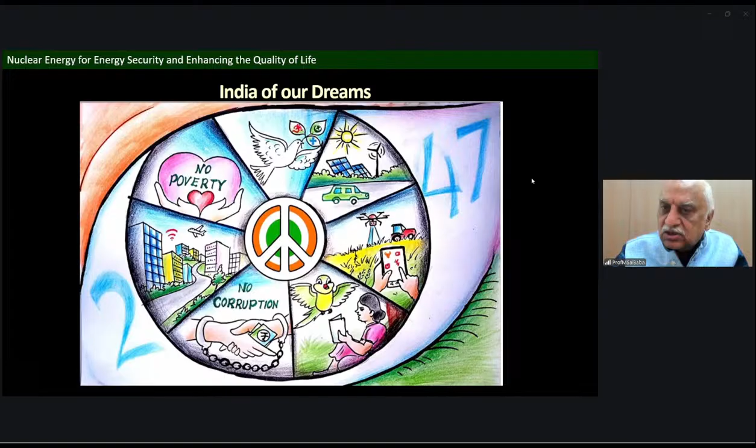Well, I think we all have dreams, and India also has a dream - Viksit Bharat - and this is one of the cartoon competitions, where one child drew what India will be in 2047. You can see it's very impactful - she depicted no poverty, peace, no corruption, education, and communication. A very significant, impactful cartoon which I think has won some award too. I thought I should show this.

But we want an India which is economically developed, scientifically advanced, and militarily strong, with security in terms of energy, water, food, health, and environment. These are all our dreams if we want to have Viksit Bharat. But what is the reality today?

Today, India has 77% of the population with smartphones. This number may be old, it may be a little higher than that. So we're very happy about this progress. But at the same time, more than 330 million Indians still lack access to safe water.

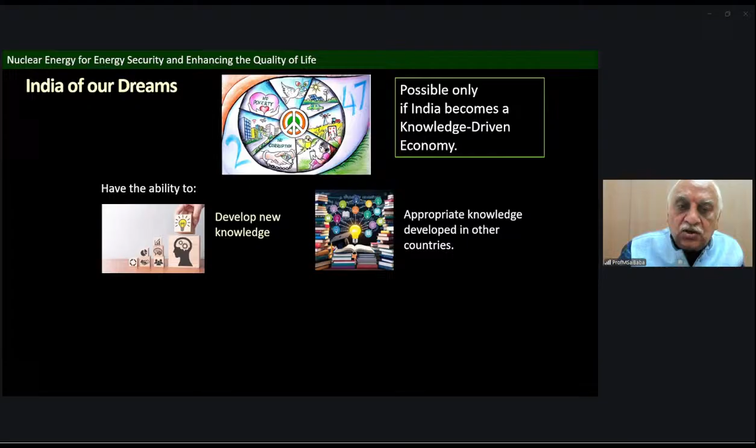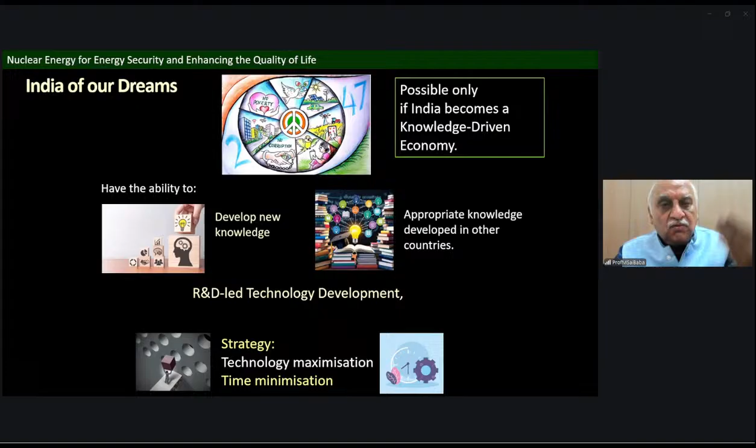This is the kind of contradiction the country is seeing. If you want to realize the India of our dreams, it is possible only when India becomes a knowledge-driven economy, with the ability to develop new knowledge and also appropriate knowledge developed in other countries. It should all be R&D-led technology development, and our strategy should be technology maximization and time minimization.

That is how we will achieve progress and realize the dream of Viksit Bharat within the time frame explained. When you take the society, the pillars of development are energy, environment, and economy. We need energy independence, and we should promote efficient utilization of this energy. While doing so, we need to conserve the environment, or at least minimize the impact of development.

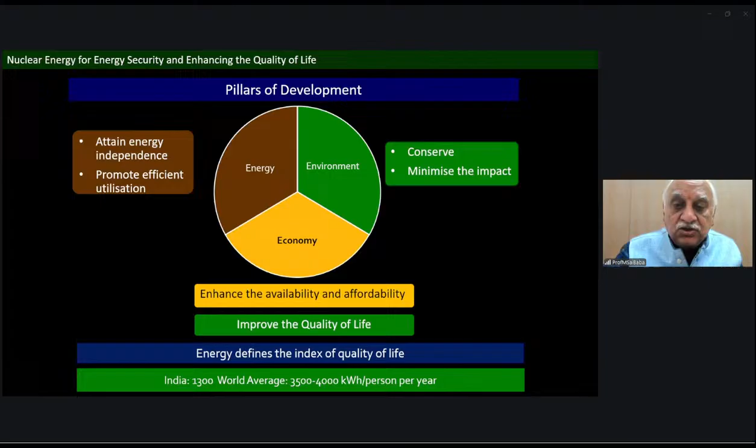And all these things have to be economical and enhance availability and affordability. At the top is energy availability, and all this is because we want to enhance the quality of life. Energy defines the index of quality of life. The world average energy availability is around 3500 to 4000 kilowatt hours per person per year, whereas India has about 1300 today. So that means a long way to go for us to reach the world average.

Forget about the advanced countries. There's something called the Human Development Index, which is a combination of several factors: economy, education, health, and so on. What this plot shows is wherever energy is becoming more available, the Human Development Index is going to be very high. Where are we now today? We are somewhere around 0.6.

Our energy is about 1300 or so. And where you want to be, if you want to reach a level of 0.9, the energy required should be at least 4 to 5 times that. That is the challenge we have in terms of making energy available.

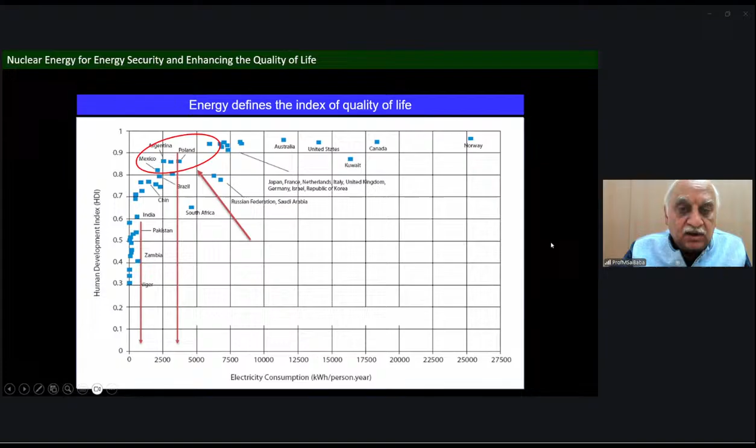Now, what are the challenges? One, we need more energy. When we need more energy, we are also saying we should reduce emissions. It should be cost effective, and more importantly, the public should accept it. These are the challenges of enhancing energy input.

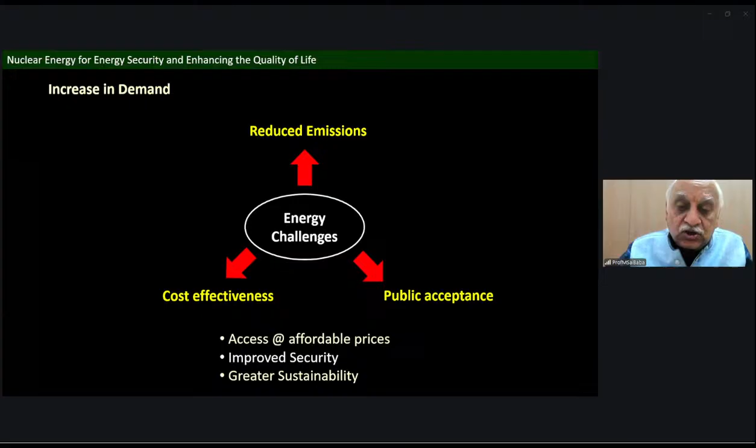The Niti Aayog came out with a government view and said our focus will be access to energy at affordable prices, improved security, and greater sustainability. In the current conflict going on in the Gulf, you would see why we are talking about security — improvements in security are important. There are several sources of energy: solar, wind, hydro, geothermal, hydrogen, fuel cells, battery storage. Multiple options are available for us.

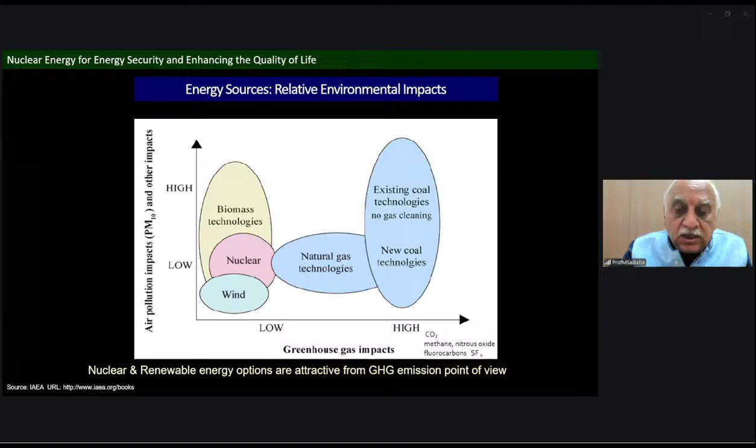When it comes to multiple sources of energy, if you want low greenhouse gases and low air pollution, wind and nuclear are the ones lowest in terms of greenhouse gas emission and air pollution. Now, just quickly looking at other sources: hydro is very good, with large scale displacement, but it's very good for energy production as well as agriculture. However, there are societal issues in terms of large scale displacement, and unfortunately we have almost reached its potential — no more potential to explore when it comes to hydro.

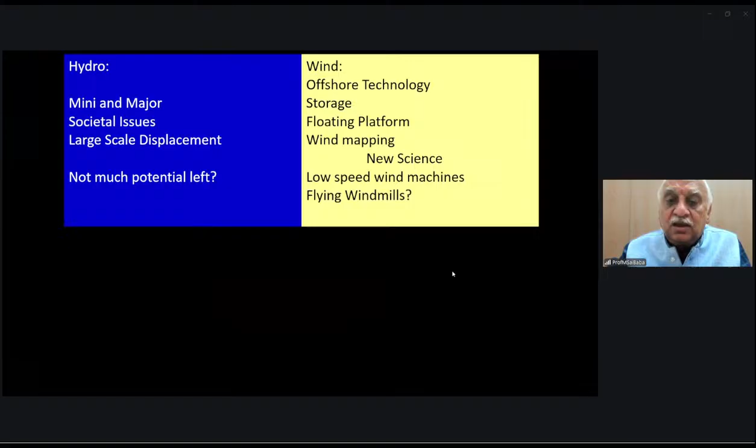When it comes to wind, offshore technology, storage, floating platforms, wind mapping — several things are happening, including low speed wind machines. And when it comes to solar, everywhere solar is there. Everybody thinks solar is good. Yes, it is good, whether photovoltaic or thermal. But the problem is we have to address transmission and distribution problems, economics, and storage.

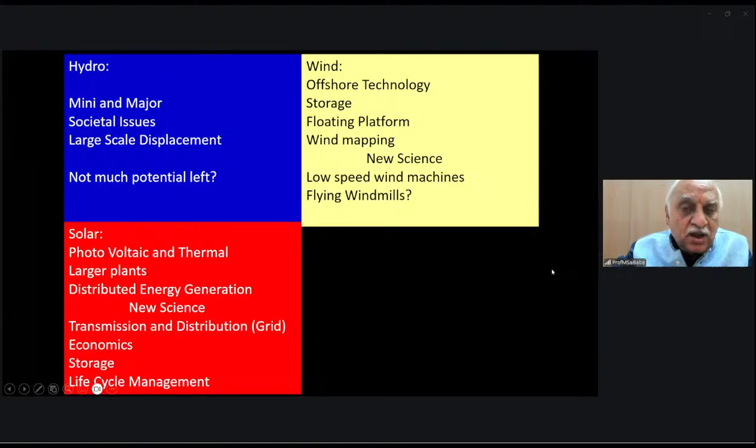Nobody is talking about life cycle management of solar panels. It becomes a huge problem after some time when the solar panels need to be disposed of. Biofuels are a good alternative, but there's a conflict between food and energy for a developing or aspiring country like India, where for a lot of people food security becomes very important. Hence every energy source has its own challenges.

So there are some direct and indirect costs of renewable energy integration. We should create green energy corridors, interstate, to carry surplus from renewable energy. Suppose in Karnataka more green energy is created, then you should be able to transmit it to a state where energy production is less.

Another biggest challenge is the cost of standby capacity. When you want to use renewable energies and they are not available, what will you do? And if they are available, what will you do with the capacity you have added? This is where standby capacity becomes a problem, needed to meet demand when solar and wind power reduces.

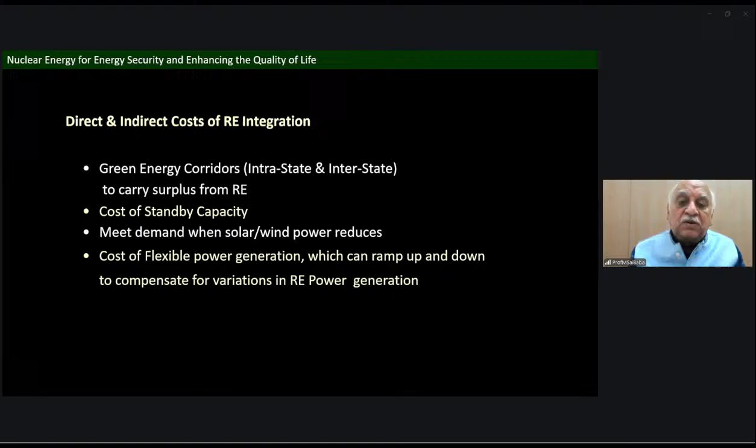Cost of flexible power generation: suppose I have a coal power plant, and you say don't operate it now, operate tomorrow. That means you're cycling the entire machinery. So this flexible power generation can be a big challenge for the technology.

Let's look at what the world is doing. If you take Germany as an example, it's one country which has gone real into renewables. They decided against nuclear, and you can see almost 56% of their energy is coming from renewables. Nuclear has almost become zero due to that decision making.

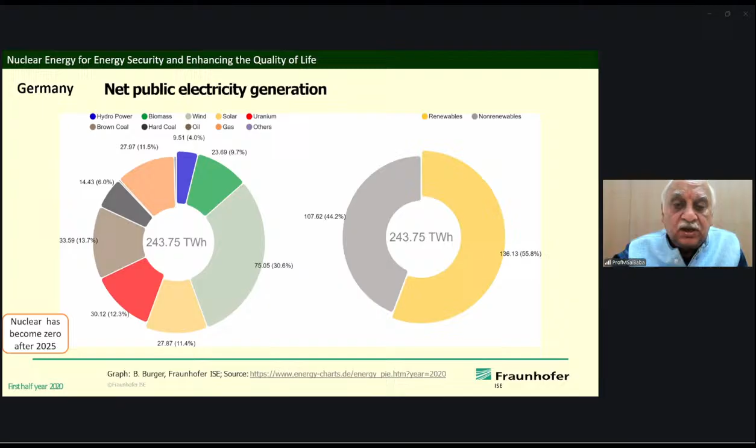When it comes to France, you can still see what used to be 71.7% of consumption energy produced from nuclear has now reduced to about 65%.

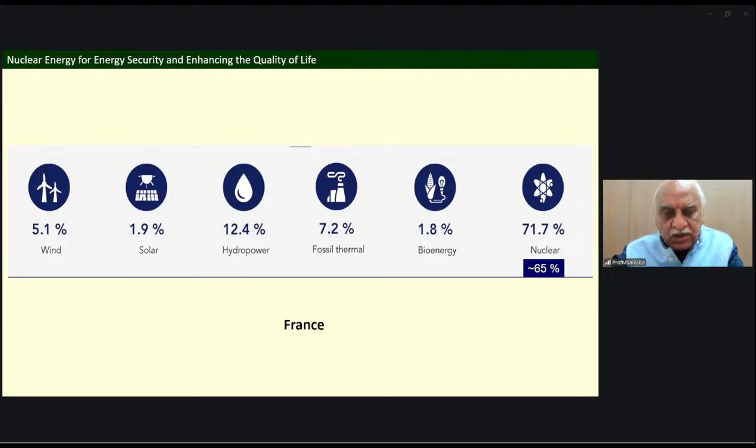So what I want to say is, when it comes to energy generation, still the majority of energy is coming from fossil fuels, and about 79% of it comes from fuel.

This is where I think, when we look into energy - when you use a diesel car, you feel dirty about it, but then you move to electric and feel very clean. It's very good to move to EVs. But then, where is the energy coming from for this electric vehicle? Where is the electricity coming from? If you do not address the source, that means we are only shifting the burden from the car to the power plant. 85% of emissions are energy related, and out of those energy emissions, 95% are carbon dioxide. This is the situation we're facing as far as energy utilization is concerned.

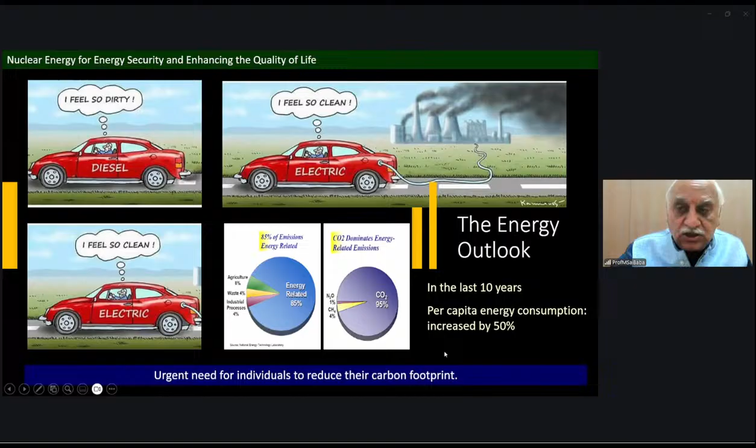In the last 10 years, per capita energy consumption increased by 50%. Just imagine the type of requirement we are having. That means we need to work towards reducing the carbon footprint for each individual. This is a goal set for each individual.

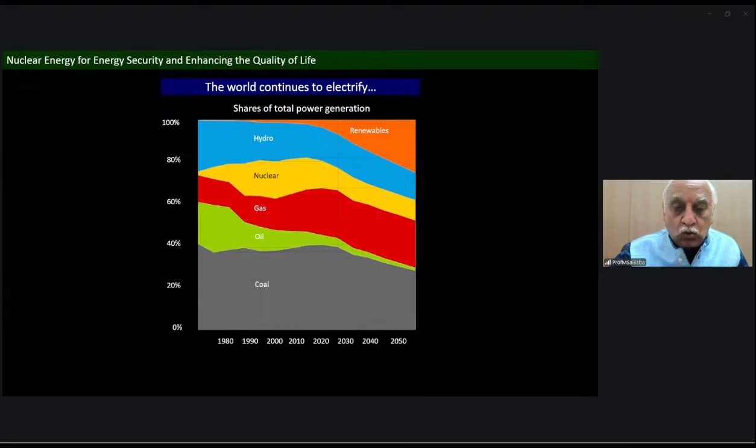Now, whether we like it or not, the world continues to electrify. An analysis says even beyond 2050 or 2060, coal will continue to play a role, maybe about 30% or so. Maybe gas will dominate, oil will come down, nuclear remains stable. Hydro, as I told you, has almost reached its potential. Maybe renewables will start increasing. This is the prediction for the energy outlook for the next 30 to 40 years.

So we need a source of energy which can replace coal, which is almost 30% of it right now. If nuclear is deployable at large scale to meet the base load, I want to repeat and say: if you want to replace coal, the base load requirement can be met by nuclear. Perhaps at present, it could be the only such alternative for the world. Other than going to nuclear, there doesn't seem to be an alternative for replacing coal.

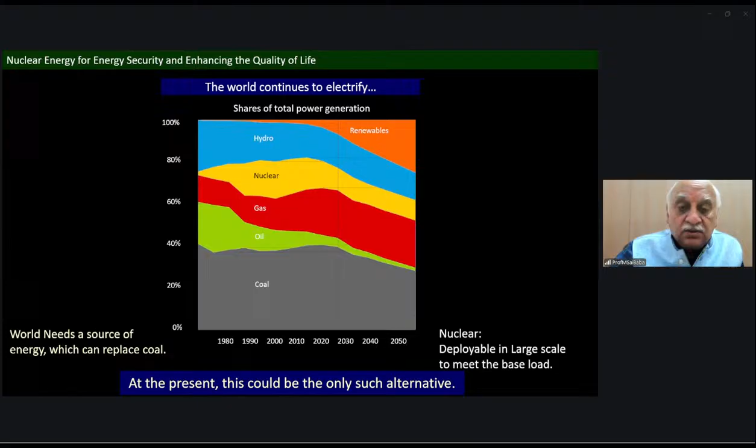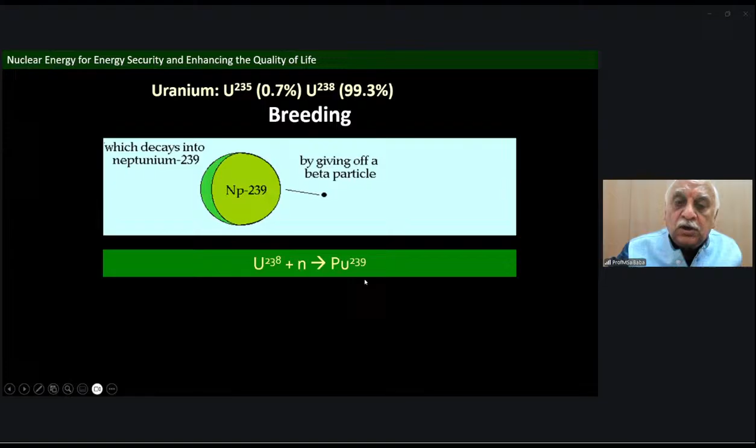Unfortunately, if you take uranium, the only fissile material naturally available is uranium-235, which is only 0.7%. Uranium-238, which we call the elder brother, is 99.3%. Uranium-238 is what we call the fertile material - one which, upon interacting with a neutron, undergoes a chain nuclear reaction, gets converted into neptunium, and then gives you plutonium. That means uranium-238, upon interacting with neutrons, becomes a compound nucleus, undergoes changes, and finally gives you plutonium-239, which is a fissile material. So that means you have uranium-235, which is fissile, and plutonium-239, also fissile, which can be generated in a reactor.

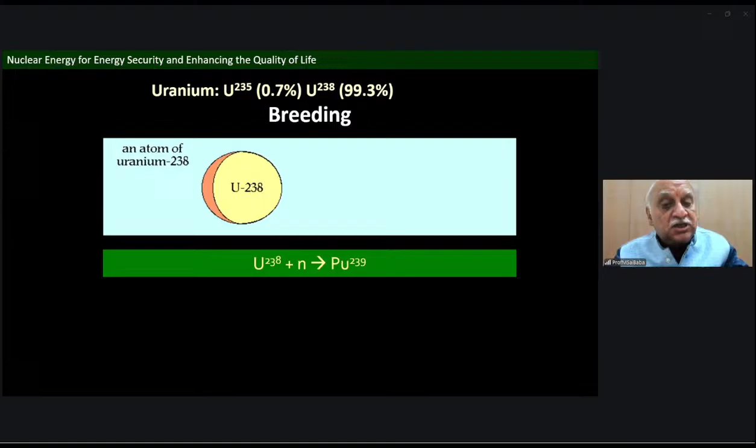When it comes to thorium, thorium is monoisotopic, and it is a fertile material. That means it cannot undergo fission by itself. So when you put it in a reactor, just like uranium-238 to plutonium-239 conversion, thorium-232 will get converted into uranium-233, and uranium-233 is a fissile material. So we have three known fissile materials: uranium-235, plutonium-239, and uranium-233.

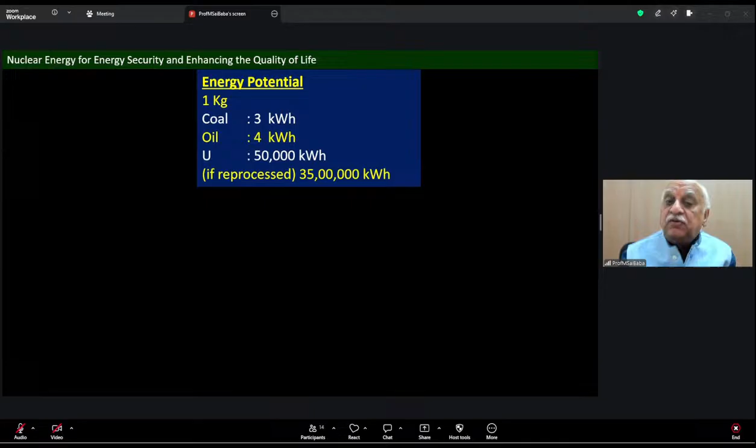Now, let's look at the potential. If I use 1 kilogram of coal, I generate about 3 kilowatt hour of energy. But if I use 1 kilogram of uranium, you can generate as high as 50,000 kilowatt hour. That is a very high potential source of energy.

In terms of a nuclear plant, let's say I have a 1000 megawatt power plant. If you want to run this 1000 megawatt plant for 1 year, you need about 26 lakh tons of coal. But when it comes to nuclear, in a PHWR, you need only about 200 tons of uranium. And if it is used in a breeder reactor, we will need much less uranium, equal to 1.3 tons.

And just for example, if you want 1000 megawatt reactor equivalent energy to be produced, you may need about 20 to 50 square kilometers of solar power. That means for one city like Mumbai, to produce that solar energy you need another adjacent city just to produce the energy. Same thing is true with wind also.

Typically, when you talk about nuclear, people always worry about waste. Every coal plant, because about 10% of the coal is ash, retains it as ash, and you can imagine in 1 year about 2,60,000 tons of ash is generated. When it comes to nuclear, it's about 250 kilograms of plutonium, which we don't want to call waste, maybe 30 tons of high-level waste, and about 800 tons of low-level waste. Just because of the high potential of nuclear, the fuel requirement is less, and hence the waste that is generated is also less.

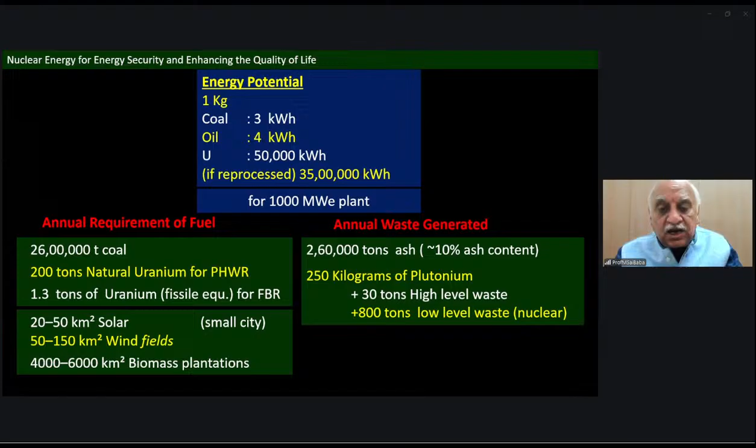What is the situation worldwide? Today we have about 438 reactors operating, generating about 400 gigawatts, about 9% of the total energy produced is through nuclear.

But the problem with nuclear currently is that there are several reactors which are old now. About 67% of the reactors are more than 30 years old, and others are higher in age. That means they are all reaching their aging, many of the reactors are getting aged. So we need to address this issue if we want to sustain the energy contribution from nuclear. In 2025, 4 reactors have been added, 4.4 gigawatt of new energy has been added to nuclear.

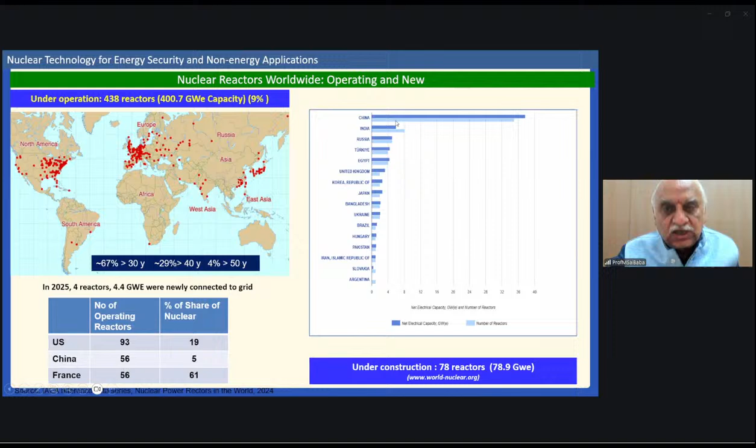Just for information, United States, which has 93 reactors operating, 19% of the energy comes from nuclear. And when it comes to France, today 56 reactors are running, around 61% of the energy is generated from nuclear. There are 78 reactors under construction, almost contributing to 78.9 gigawatt electric. And you can see China is there everywhere. I think whatever you say, China will always be there. China has one of the maximum numbers of reactors coming forward, followed by India and Russia.

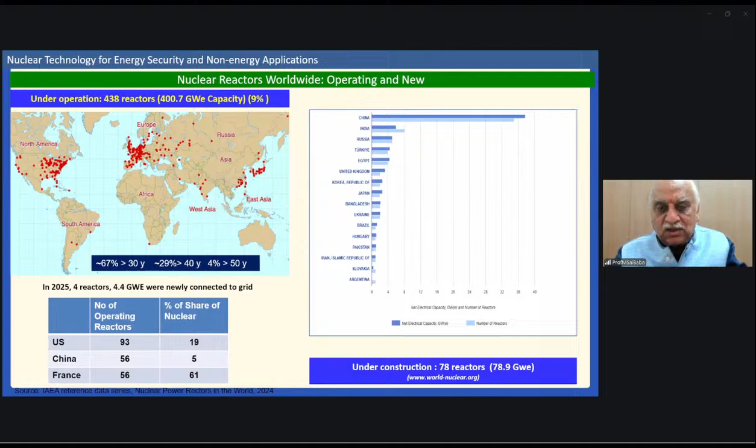So that means nuclear is there and nuclear will be there, and they want to multiply by adding some new reactors. So let me spend a few minutes explaining the 3-stage program of India. Homi Jehangir Bhabha, the father of Indian nuclear energy, envisaged this much before, taking into consideration the Indian situation - we have less uranium and more thorium, and hence he envisaged this 3-stage program.

In the first stage, in a thermal reactor, you put uranium-235 and generate power, along with depleted uranium - since about 99.3% is uranium-238, that will be in the depleted uranium. The plutonium generated in thermal reactors is utilized in a fast reactor, which is a plutonium-fueled fast reactor. It's a breeder reactor, meaning more fuel is generated than consumed, and hence you can sustain the reactor for its lifetime while also generating power.

You introduce thorium into these fast reactors, then you will generate uranium-233, and this uranium-233 along with thorium together will run in uranium-233 breeders - that is the 3rd stage of the program. Many people may think, since we have more thorium, why can't we utilize it early? What I want to say by the 3-stage program is that the uranium-to-plutonium conversion can happen in thermal reactors as well as in fast reactors.

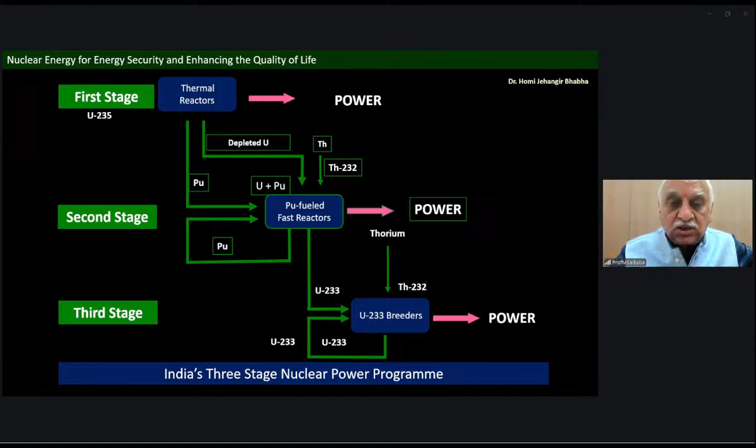The best part of it is that nuclear power is a combination of several things, starting from mining to designing, constructing, operating the reactors. India is self-sufficient in the fuel cycle, starting from fuel fabrication to structural materials to fabricating fuel bundles. India has indigenous technology and self-sufficiency in the fuel cycle. Self-sufficiency is also there in fuel reprocessing and waste management, meaning we are closing the fuel cycle. Closing means you put uranium in a reactor, produce power, take it out, separate the remaining uranium, separate the plutonium that is generated, and make use of it for refabricating.

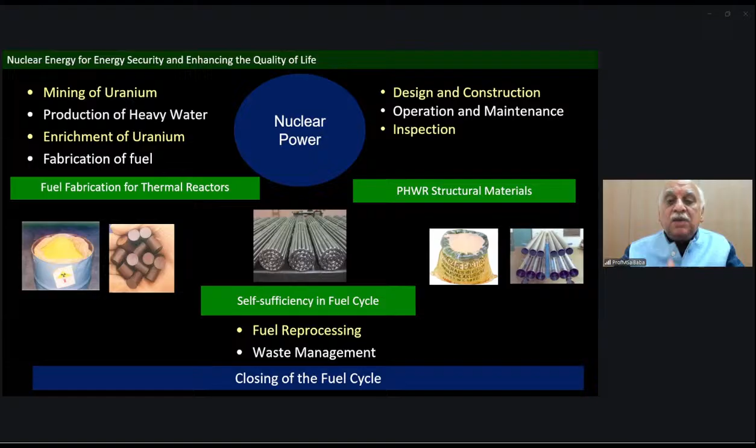Now, how are we doing it here? How have our reactors been performing? The continuous operation of nuclear power plants - you can see the number of reactors operating for more than 300 days is increasing, and multiple reactors are operating for more than 1 year. As the years are passing, the number of reactors operating for more than 1 year is increasing, indicating that it is a mature technology.

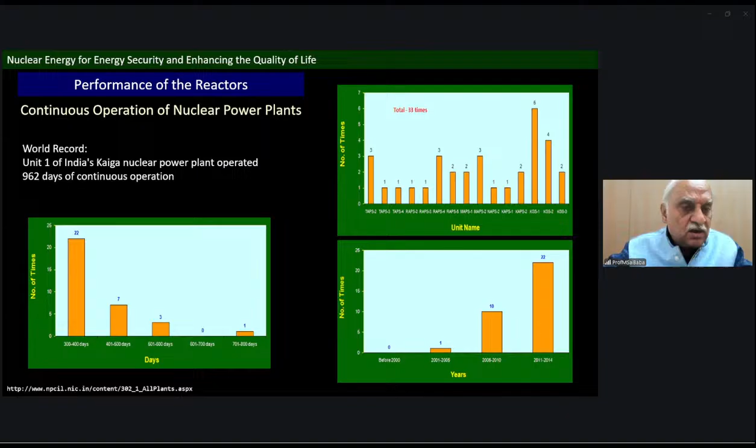India has also set a world record. Its longest operated PHWR was Kaiga Power Reactor, 962 days. I think subsequently other reactors went beyond that, but we could achieve this for the first time at that height. Now our reactors are operating well.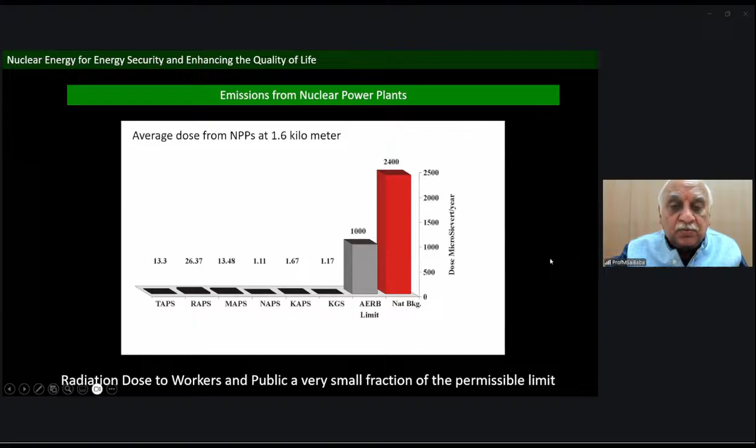And somehow people should also be aware that natural radiation is there. This IERMON data which I'm showing you here shows that there are so many places where the radiation backgrounds are higher, and they are not necessarily connected to any nuclear power plant or nuclear facility being there.

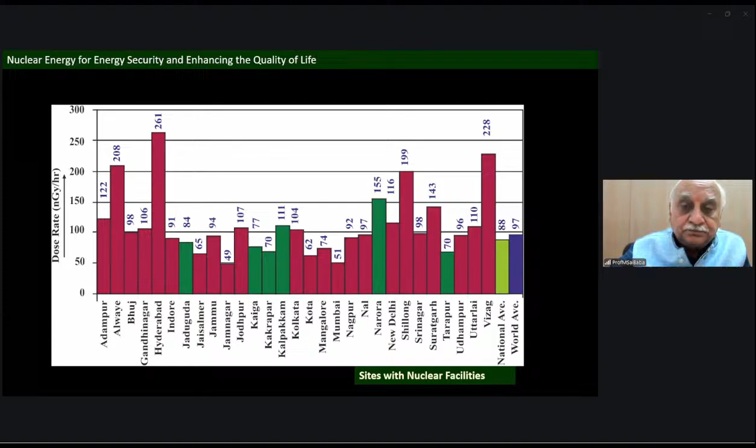Now you can see how the evolution of technology happened. We started with research reactors and went on with thermal reactors. Based on the research done in thermal reactors, we moved to commercial reactors, starting from 220, we went to 540 and 700. We have now standardized on 700. We are also importing reactors and trying to operate them. So these timelines show expansion and economy of scale over a period of time.

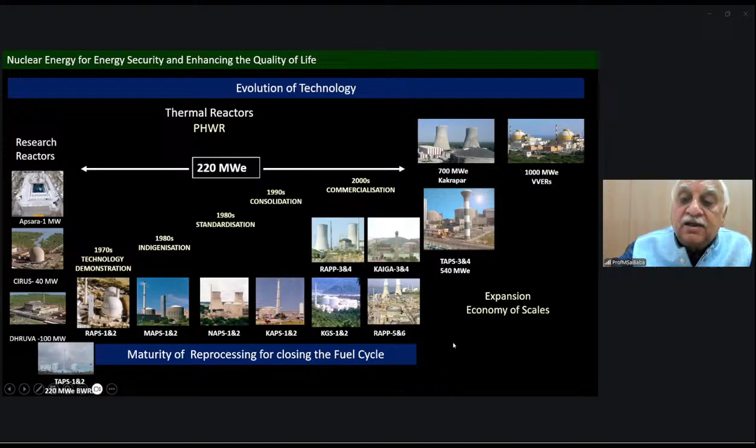While this mastery is happening, we also matured fast reprocessing for the closed fuel cycle, getting ready for the second stage. And when we are thinking about expanding or increasing reactor size, there's also a lot of interest in making the reactor smaller.

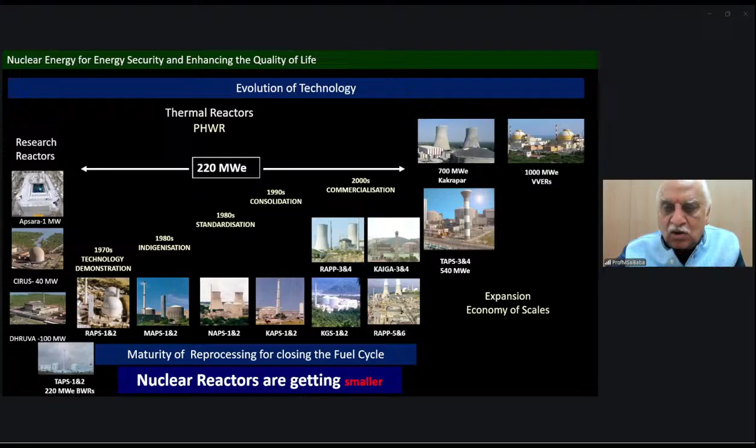Now, no discussion on nuclear would happen without discussing small SMRs. There are issues - maybe it requires a separate topic altogether about how we approach SMRs. But that's how we want to take reactors into smaller ones.

You must have read in the papers a month back or so that India achieved a breakthrough. The fast breeder test reactor at Kalpakkam is a 40 megawatt thermal reactor. It's a sodium-cooled loop type reactor, which is a test reactor but also produces power. It uses a very unique fuel, uranium-plutonium mixed carbide, and has been running for more than 40 years.

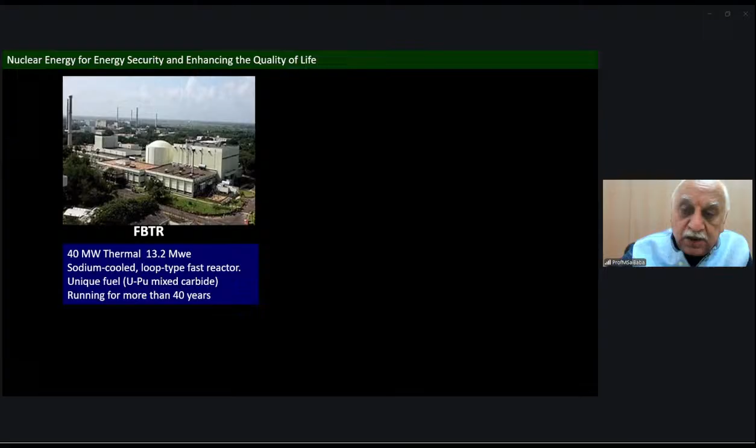Based on all this expertise, the prototype fast breeder reactor is being constructed. I'm very happy that about a month back it went critical, meaning its sustained chain reaction has been demonstrated. It uses a mixed oxide fuel, and it's a pool type reactor.

Essentially, these are serving as a platform for working on fast breeder reactors, providing operational experience and testing new fuel types. If you recall my 3-stage program which I showed a while ago, this is the beginning of the second stage of the reactor. Just to add, we also have a reactor at Kalpakkam called the Kalpakkam Mini Reactor, functioning from 1996 onwards - a very small reactor, but it uses uranium-233 as fuel. Probably for a long time, it's the only reactor in the world which uses uranium-233.

Recently, another research reactor has been added, I think in China. So there's a uniqueness in all 3 stages being demonstrated. This is like gaining experience of using uranium-233 as a fuel. It's also used for neutron radiography. I will mention it a little later.

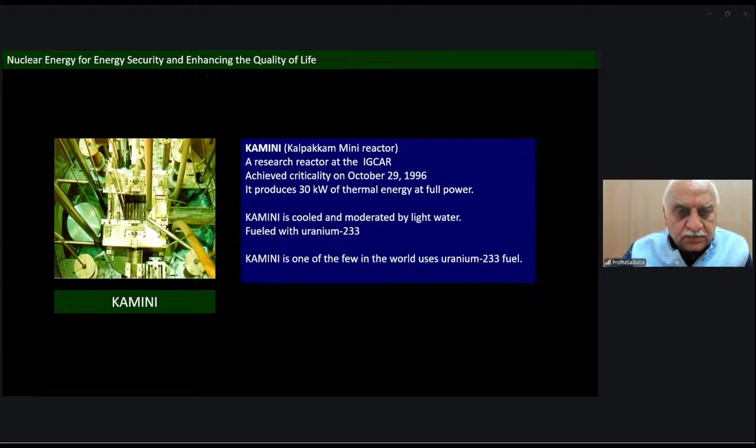A lot of advancements are being talked about. There's always impatience about thorium, so early utilization of thorium. That's why advanced heavy water reactor is being planned, is designed, and is now going through regulatory clearances. Maybe it will happen soon.

The department is also working on high temperature reactors, both for hydrogen production with electricity and desalination, accelerator driven systems, and advanced thought about fusion based systems. These are all things being done for the futuristic development of advanced nuclear energy systems.

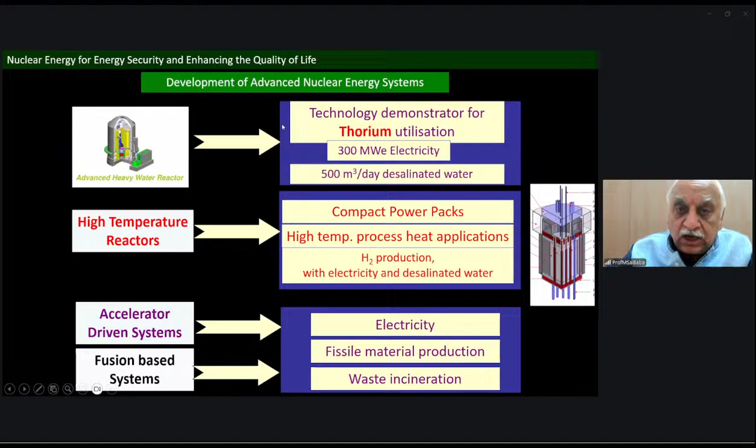Now, what is India's immediate target? You can always say you're telling multiple things, but what is our target? India's government has set a target that we will increase the share of nuclear energy to 10% of total electricity. The world average is about 9%, and we would like to reach that level.

We have to standardize nuclear power plants because we have PHWRs, we have LWRs, we have FBRs, and India has also set a goal of 100 gigawatt by 2050. So what is being talked about is serial production of nuclear equipment and capacity build-up in the industry. That's how multiple reactor construction can happen.

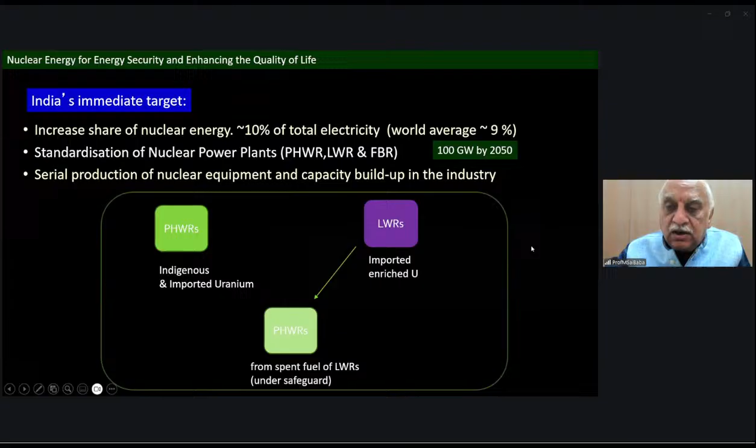So you will have PHWRs with indigenous uranium and also imported uranium put on these reactors under IAEA regulation, and we also have LWRs which are imported. Under these safeguards, the LWRs use enriched uranium. So the fuel coming out of LWRs can be utilized as fuel for PHWRs, because PHWRs use natural uranium fuel. This is how it is envisaged: when you import an LWR with the right to use the fuel, you will be able to utilize it in a PHWR, so that enhances nuclear power.

A lot of discussion is happening on private sector participation. The private sector participation so far has mostly been the EPC part of it. Government is signaling to expand the nuclear energy sector with private sector participation. It has already invited major enterprises like Reliance, Tata, Adani's, and Vedanta to see whether they have interest.

And NTPC is taking big steps. You must have read in newspapers that NTPC already put up a proposal that they would like to develop 2 or 3 sites with nuclear power plants. Jindal, Hindalco, all these people are coming forward to replace their captive coal plants with nuclear power plants. That's where the interest in small modular reactors is also coming.

The operational framework for private sector participation is a question being discussed between the industry and the government. We need to establish public-private partnerships like NPCIL and NTPC. Maybe Niti Aayog said we need to advocate the promotion of SMRs to encourage private sector participation. These are all things that are happening.

The SHANTI Bill has been enacted. Now the SHANTI Bill enables and empowers private entities to enter independently for nuclear energy generation, so either you collaborate with the government agency or you can do it by yourself. But then there's a big challenge which people have not discussed much, and that is skilling.

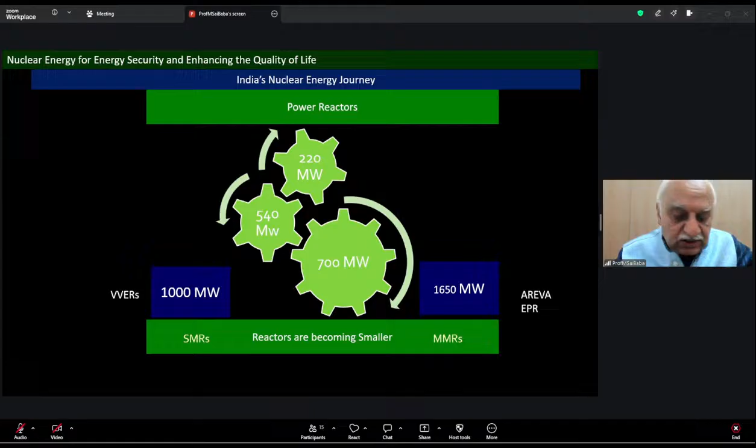We need to have a skilled workforce if we want to meet our aspirations of having 100 gigawatt by 2050. So we started with 220, 540, 700 megawatt reactors. We had started importing reactors at 1000 megawatt. The EPR, the Areva, is about to bring 1650 megawatt. And then suddenly we are talking about getting into small reactors, and micro reactors are the ones being discussed extensively and put to use.

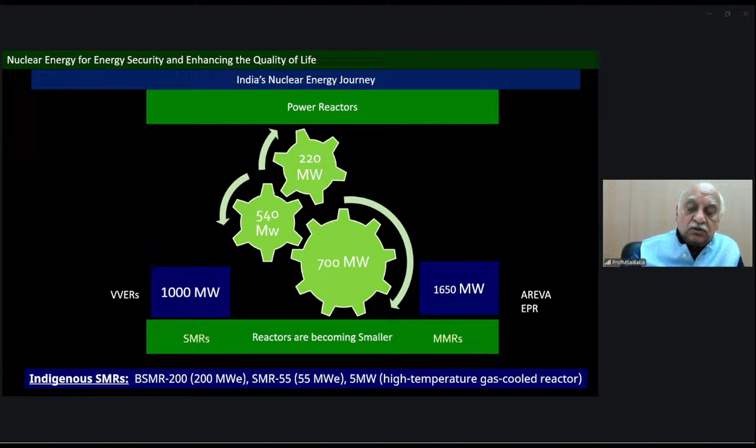Indigenously, what is the plan for the government? India has come out with a plan to develop 200 megawatt reactors, 55 megawatt reactors, and 5 megawatt reactors. The 5 megawatt is a micro reactor, a high temperature gas cooled reactor. This is what the government has come out with, mandating the department to work on these 3 reactors.

When it comes to micro reactors, they look small and portable. You can build them somewhere and come install it. It will enable rapid deployment and operate for years without refueling. This is another thing they are thinking of, like a 'fill it, shut it, and forget it' concept: put it inside and maybe operate for 10 years, then take it back to the factory and replace the fuel element.

So there are multiple uses: power generation, process heat, desalination, maybe hydrogen production, and serving places where you cannot reach out, like border areas or remote areas. These reactors can be used and deployed in military installations, and in locations recovering from natural disasters. Suddenly a natural disaster happens, and maybe such microreactors can go there. In space missions also, they can be used.

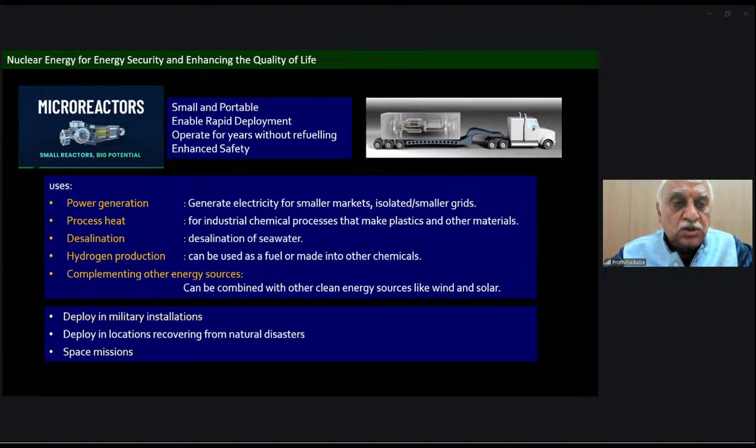So there are challenges, the manufacturing challenge, economic viability. Normally the sense says larger is better, but now we are talking in terms of smaller cost per megawatt, capital cost. These are all challenges when you want to reduce the size of the reactor.

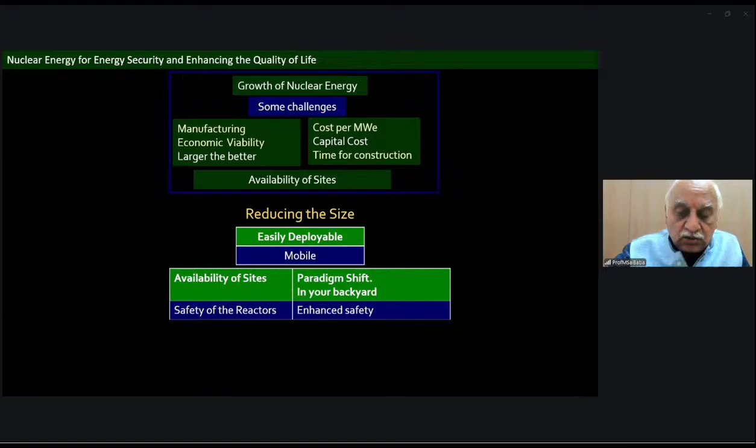But of course, where are the sites now? Reduction in size makes it mobile and easily deployable. The availability of sites is where you have to choose between SMRs and normal reactors.

There should be a paradigm shift so that you want to have it in your backyard, with enhanced energy security and safety. Now all this while, I've talked about energy security, why you need clean energy, how it can help with climate change, and how nuclear is progressing in our country and in what way we are taking it forward.

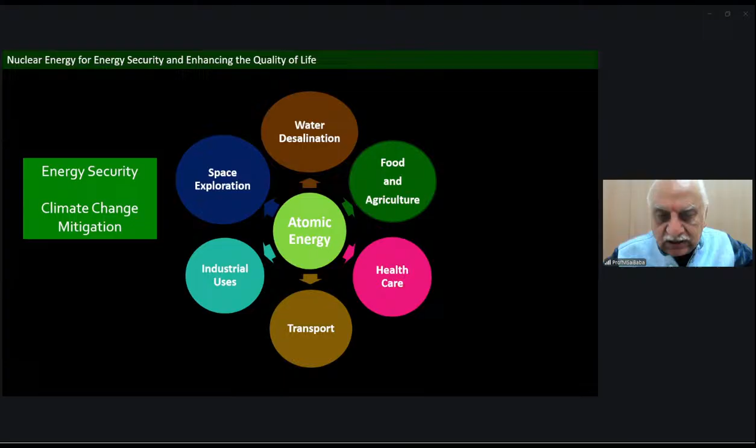Now I'll shift my discussion to the other uses of nuclear. Nuclear doesn't mean only nuclear reactors or nuclear bombs. There are multiple applications, starting from water desalination to food, agriculture, healthcare, transport, industrial uses, and space exploration.

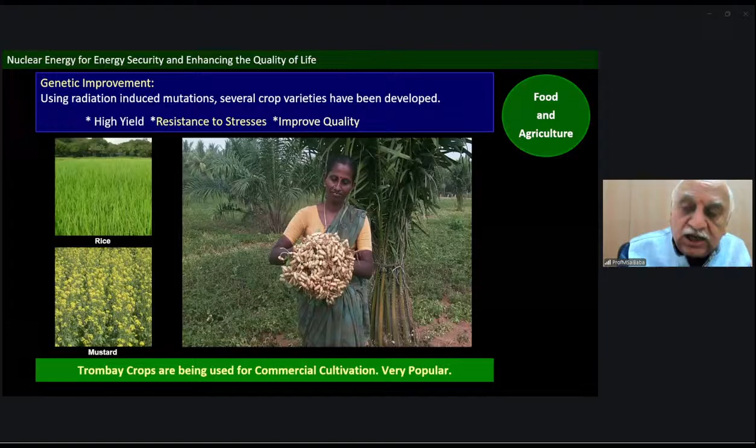You all must have heard about radiation processing. This is very useful for preserving food products, starting from inhibiting sprouts in onion, potato, ginger, or garlic, to shelf life extension of food like chicken, meat, or fish, and insect disinfection in cereals and pulses. Radiation processing has multiple advantages.

Of course, it depends on the purpose, how much dose has to be given - low, medium, or high. Now there are units established for food processing. Just like you go to the airport, give your luggage, it gets scanned and comes out, the same way food items can be scanned. It's there in Vashi, Navi Mumbai, and coming up in many other places.

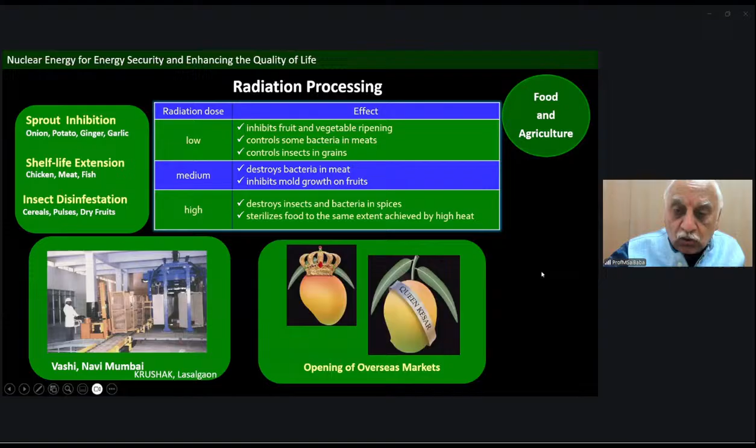We should also know that food processing is very important - radiation processing is very important if you want to export food products. Till recently, you could not export Indian mangoes to the US. Our friends and relatives there would be missing Indian mangoes. Today, with this radiation processing, they can export these food products, and our friends and relatives enjoy Indian mangoes as much as we do.

This also gives a market for the farmers and enhances their income levels.

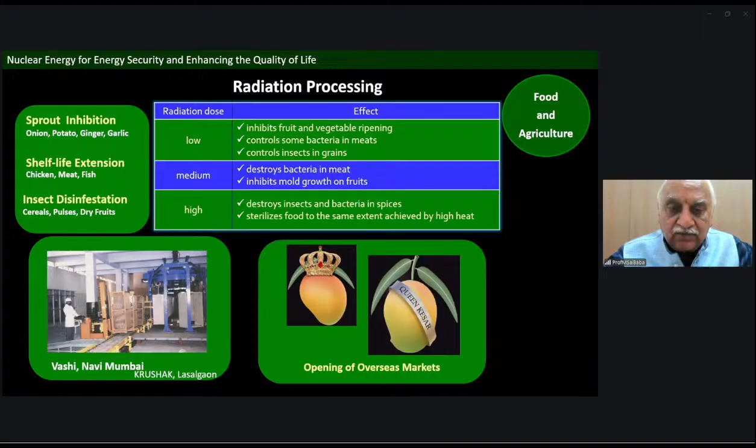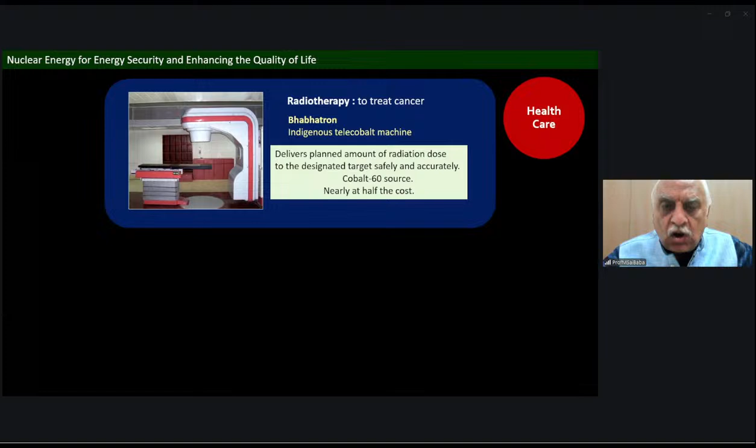Radiotherapy - I'm sure if somebody is identified with cancer, you need to treat with radiation. Bhabhatron is an indigenous telecobalt machine, built at very low cost, and it is being made available for medical treatment. Of course, sterilization of medical products is another big challenge, and radiation processing can be used for disinfecting medical aid and sterilizing medical products.

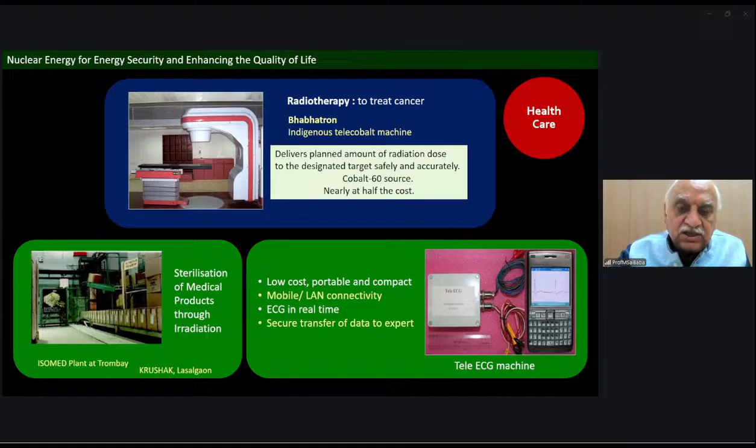We also developed a tele-ECG machine based on available technology. There's no radiation source in this, but it's a technology demonstration that helps a lot for people living in remote areas. Very commendable work is being done by Tata Memorial Centre in providing affordable cancer care.

They are also working on the National Cancer Grid, linking about 108 locations across the country - one of the largest cancer care networks in the world. The grid connects cancer centers, research institutions, patient groups, and NGOs. In fact, they also have...

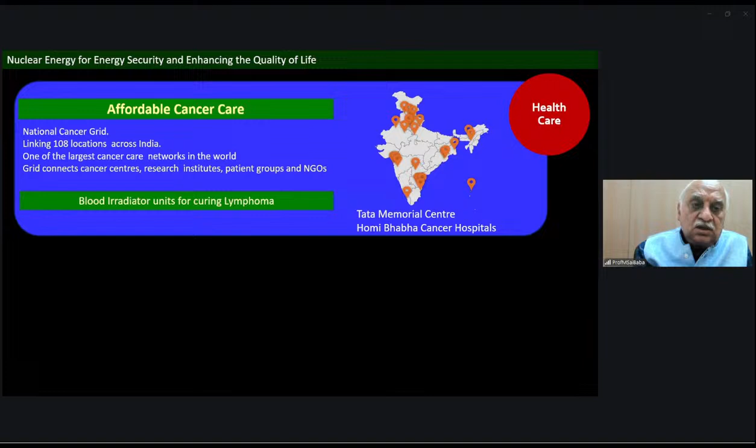There was no record of cancer patients before; now a registry for cancer patients has been developed.

A lot of radiopharmaceuticals are built by BRIT, one of the DAE institutions. These radiopharmaceuticals are made, separated, and prepared in a way that they can be supplied to hospitals. Each of these isotopes has a particular application, and now all these things are being done by this institution.

For industry, it is used extensively for radiography, starting with X-ray radiography, gamma radiography, or neutron radiography, and it's very extensively used for quality control.

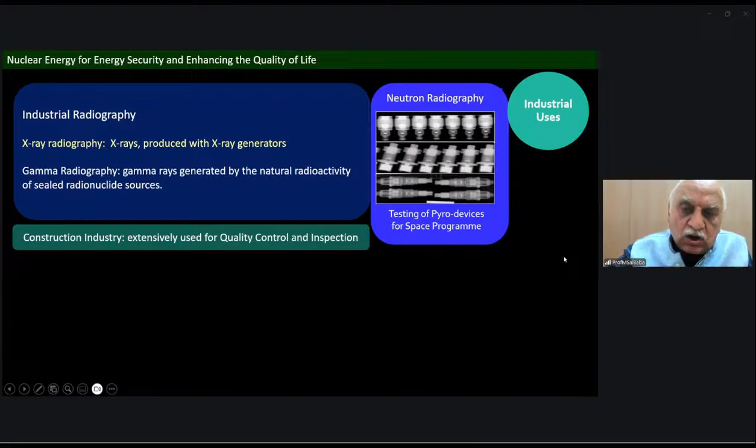Neutron radiography is used in multiple applications. One very interesting application is for the pyro devices used in the space program. The pyro devices have pyrochemical filled in them. If there's any gap in the filling, it will lead to failure. So every pyro device in a spacecraft that flies undergoes neutron radiography to ensure it is properly filled. This work is done at Kamini, the small reactor I showed you at Kalpakkam.

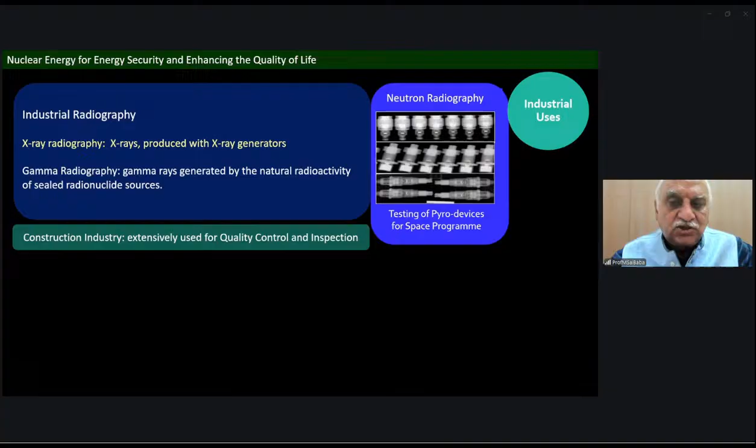When large power plants are there, and I'm sure being in Mumbai you would have seen large chemical plants, you need to use radioactive tracers if there's a problem in the process to identify where the problem can be.

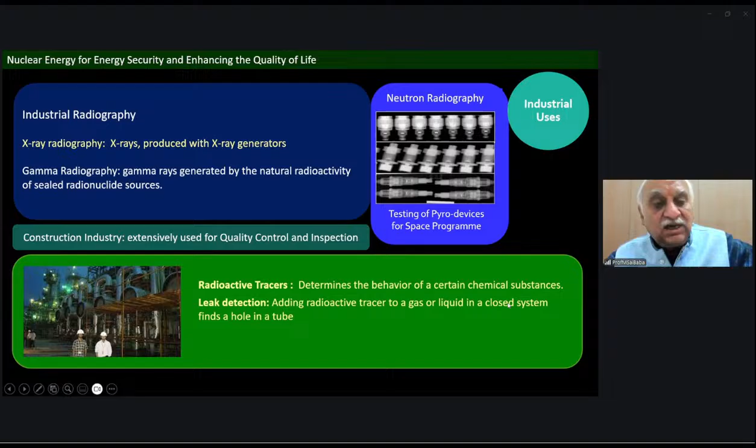That's where nuclear batteries will be very helpful. The plutonium-238, which gives you heat, can be used for generating power, and this is being used for long space missions.

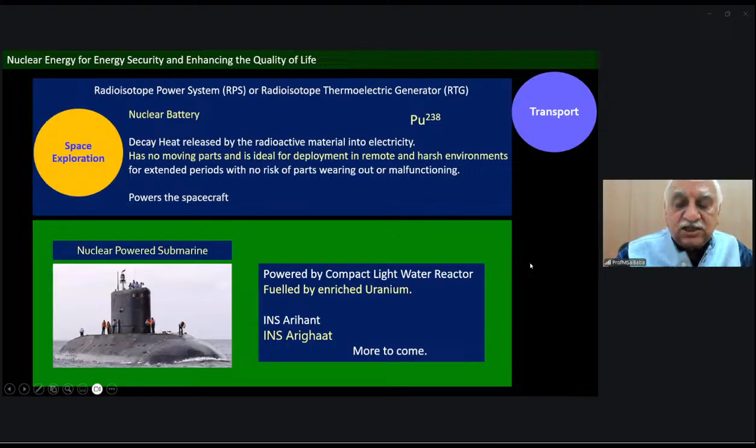I'm sure all of you heard about Arihant, and now recently the third one, also a nuclear-powered submarine. Some of you must have seen a submarine - you realize space is a constraint, space is premium. Almost 2/3 of the space is occupied by fuel. That restricts the space availability and also restricts the amount of time the submarine can spend underwater without being refueled. If you replace it with a small reactor, that would give you a lot of space and flexibility in terms of time the submarine can spend underwater before refueling.

Water is very important - making water available is important. So what is demonstrated is the extra heat that is being thrown into the sea. Normally, when electricity is produced, the steam runs the turbine and only 33% of the heat is converted to electricity. The remaining has to be dumped into the sea or a river. So what is done here is that extra heat being dumped is utilized for desalinating the seawater.

There's a demonstration plant in Kalpakkam, a very economical way of producing this desalinated water. In fact, the quality of this desalinated water is so good it can even replace DM water used in the plant. This plant is under operation at Kalpakkam. Though we call it a nuclear desalination demonstration plant, essentially wherever thermal energy is available that's being dumped into the sea can be utilized for this.

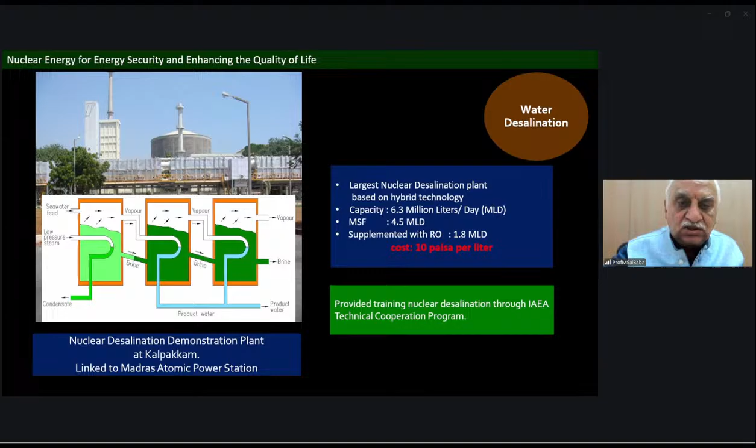So what it means is that a lot of possibilities are there, but there are some challenges. What are they? Whenever you talk about nuclear energy to people, the first thing that comes to mind is, what about the safety of the reactor? What will you do with the waste? Would it impact the environment? These are the concerns you typically experience whenever you talk about nuclear energy with people. Hence, public acceptance is the most important thing when it comes to nuclear.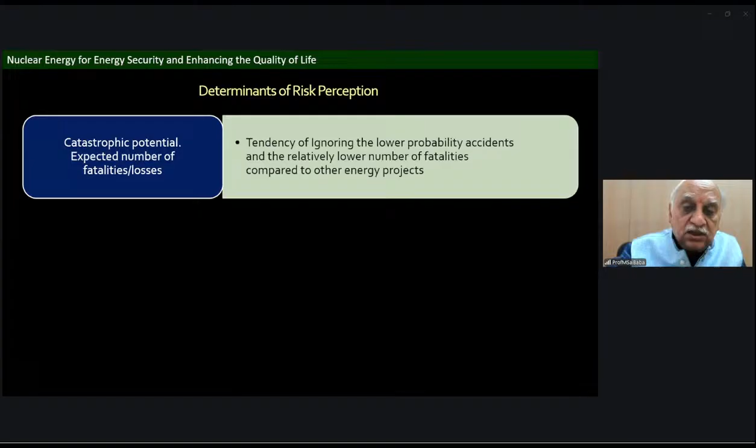What we have done - we did some work at NIAS on what are the determinants of risk perception. One is catastrophic potential - the expected number of fatalities and losses are imagined to be large. There's a tendency to ignore the lower probability of accidents and the relatively lower number of fatalities compared to other energy sources. But somehow we think it can be catastrophic.

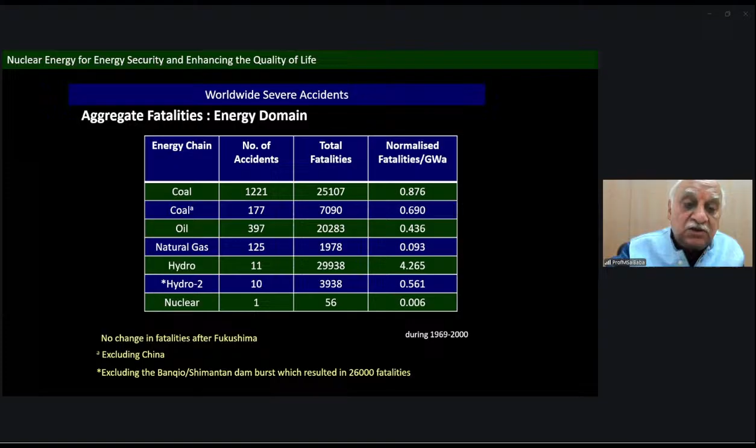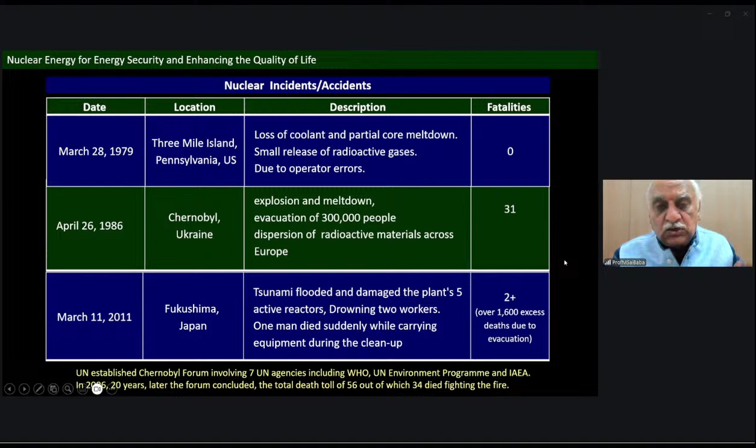There are three major accidents that happened in nuclear, and you can see the fatalities are very low. Though people think the tsunami killed so many people, Fukushima itself has nothing to do with the nuclear reactor - it's the tsunami that killed many people. The actual number of people killed was about two, and about 1,600 people died because of the evacuation. So the fatalities in nuclear reactor accidents are very, very low.

But what about other industries? You can see the type of deaths that have happened in other industries - not only human deaths, but what happened in Bhopal and what happened in the explosion of the liquid petroleum gas tank farm in San Juanico.

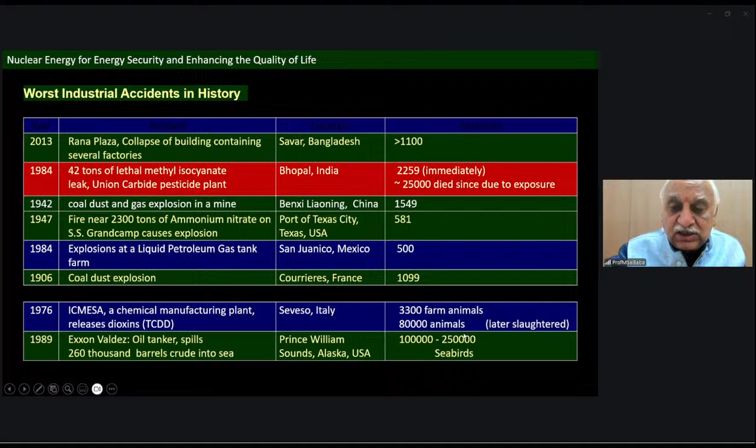You can see the number of people killed are very, very high. And of course, why worry about only human beings? You can also see some disasters led to a lot of killing of animals and seabirds. So these losses are enormous, and we tend to ignore these things and pay attention only to nuclear.

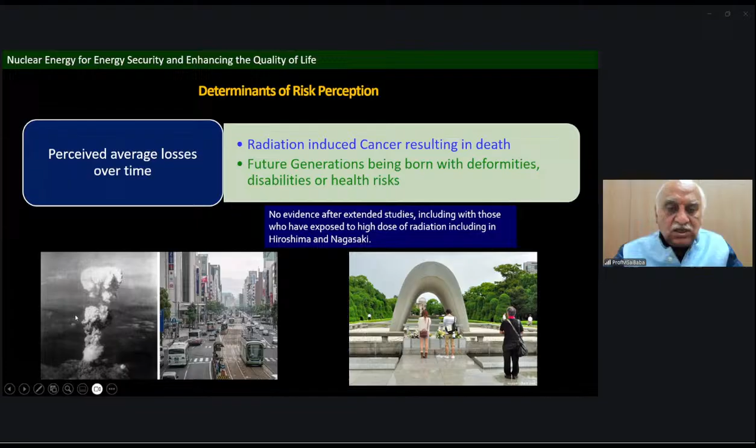There's a tendency of ignoring the lower probability of accidents, and if you don't pay attention to detailing, you tend to ignore the facts. The average perceived loss over a period of time is radiation-induced cancer resulting in death, whether future generations are born with deformities, disabilities, or health risk because of radiation exposure. There is no evidence from extended studies, including those exposed to high-dose radiation in Hiroshima and Nagasaki. You can see how Hiroshima and Nagasaki is today and what it was.

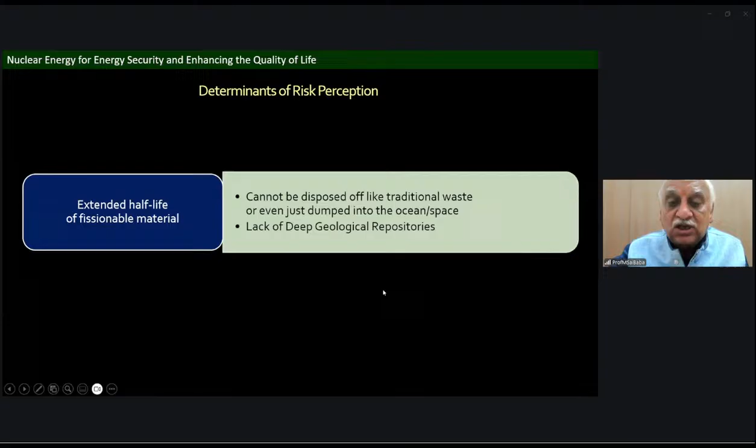Extended half-life of fissionable material, yes, you can say these are all high. You need to take care of them. You cannot dispose them; you need repositories. Yes, the work is in progress as far as deep geological repositories are considered. So we need to see high-level waste management concentrating on this. There's a three-step process, and immobilizing them will be there.

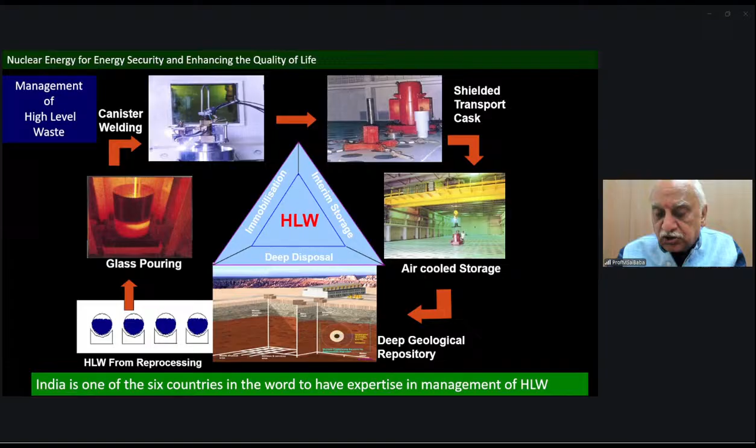India is very proud that it is one of the 6 countries in the world which has expertise in managing high-level waste. You can see pictorially: take the high-level waste, convert it into glass, and store it in intermediate storage before we get a deep geological repository. We have the technology for mastering all these things. The synthesis of nuclear waste glass in the plant, a very high temperature process, India has mastered this. You can see induction heating used to convert them to glass form.

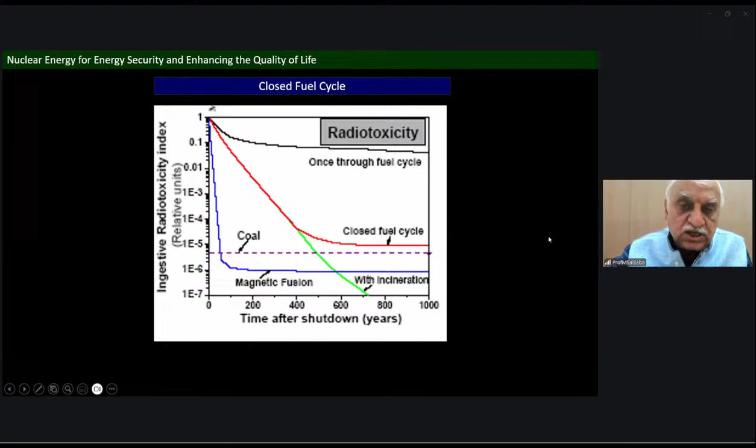What I want to show is that if you take a coal plant, the time required after shutdown is very low. With a once-through fuel cycle, you require long years to take care of the waste. But with a closed fuel cycle, it's reduced to 400 to 500 years, which is a reasonable time for us to manage the waste. Radiotoxicity can be maintained when you use a closed fuel cycle.

Now, having said that, what is nuclear technology? It is knowledge-intensive, needs well-trained human resources, and strong industrial infrastructure. We need synergistic pursuit in basic research and technology development, and a multidisciplinary approach to problem solving. We require safety analysis encompassing the entire gamut of engineering and health. We should also work towards leadership development, research for achieving innovation, and starting new programs in new domains.

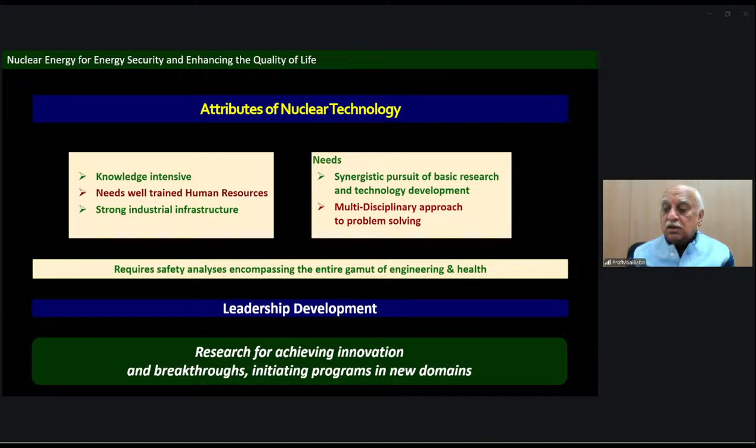And there are 3. I don't know how much time I have. Do I have some more time? Yeah. Yes, sir, we can.

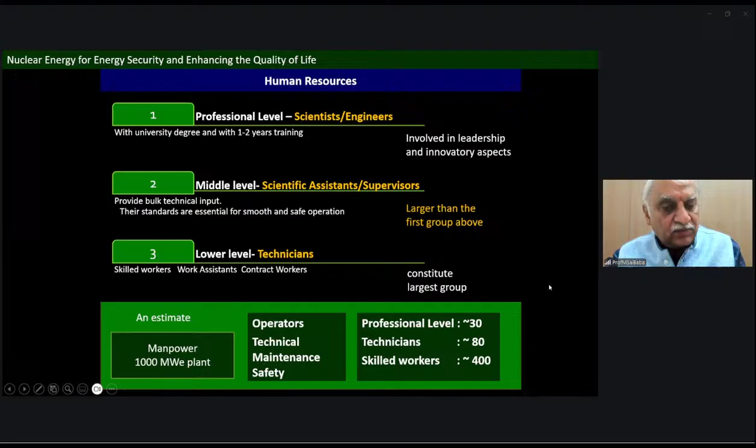So I will talk about human resources, since some young people listening will find this useful. Typically, human resources have a professional level, middle level, and low level. Professional level are scientists and engineers; middle level are scientific assistants and supervisors. For a 1,000 megawatt plant, we typically need about 30 professionals, about 80 technicians, and about 400 skilled workers. This is what is required for one reactor of 1,000 megawatts.

How is nuclear education taught? There are different models. Model 1 is teaching nuclear engineering and technology at academic institutions starting from a bachelor's degree level. Employability is restricted only to the nuclear industry, and this becomes a severe restriction when the size of the nuclear industry is small. It is practiced in the USA, where the nuclear industry was big, and followed by Europe in recent times.

The other model is to take a Bachelor's of Engineering and Master's of Science, then give specialized education and training in nuclear engineering in-house in the nuclear industry. That is followed by DAE and some other countries. The advantage of this model is that faculty are practicing professionals, so transfer of tacit, explicit, and implicit knowledge is possible.

The third model is to do Master's and PhDs in academic institutions and then get further specialized training in the nuclear industry in-house. This is again for persons with higher qualifications to uplift the standard of R&D in nuclear industries. Homi Bhabha National Institute is an example of such a model. So there are different models we can adopt for nuclear education.

So for those of you who are interested, BARC training school is a very robust process of selection. It's been running since 1957. We also have an AMD for geophysics and geology people. They specialize in almost all disciplines. It's a 1-year course and it's employment - you're paid a stipend, and after successful completion, you get employment and are placed in one of the DAE units.

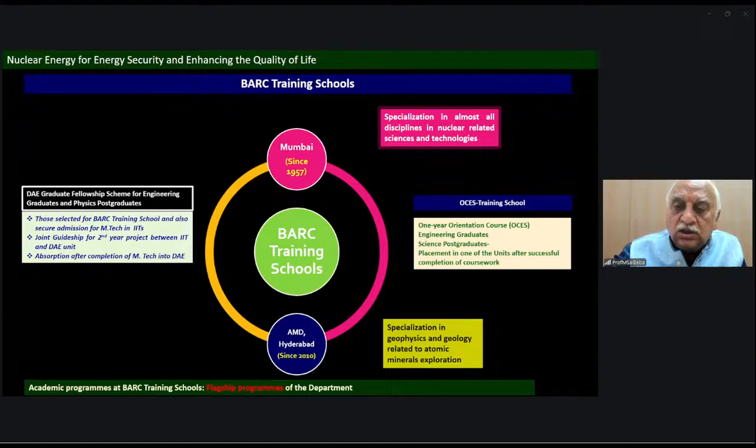Of course, those of you who are interested and got admission into IIT, you can always do the IIT MTech and then come back and join the DAE once you're selected. So there's a lot of opportunities for young people.

There are also opportunities to pursue medical physics for radiological safety, to equip medical doctors to use nuclear medicine - diploma in radiation medicine, diploma in medical radioisotope technicians, and nuclear medicine departments in hospitals. Large opportunities are there for people who are interested.

Well, it's very important to engage MSMEs. There are several issues with MSMEs - capital, human resources, cutthroat competition - but we need to involve them in our journey of nuclear growth. I would say that the academic institutions, the industry, and the MSMEs all have to come together if you want to address the challenges of achieving speedy growth of nuclear in this country.

Well, there are problems and there will be problems. I always say it always looks difficult before you climb, and once you overcome that, you will find that you will enjoy the problems which you face by climbing the mountain of sustainability.

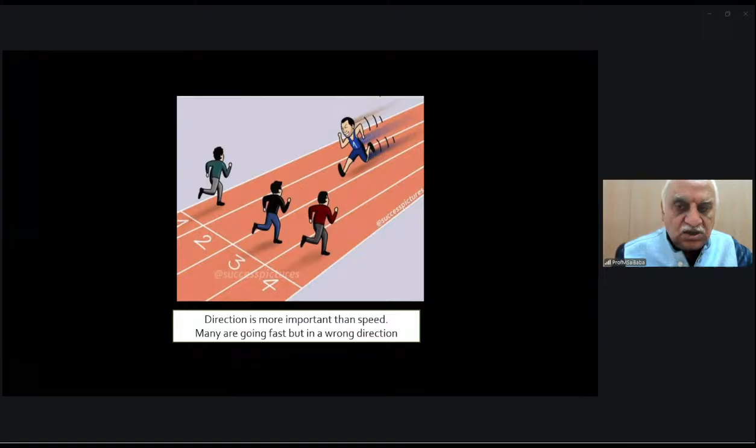Well, this is my last slide. Direction is more important - I'm assuming this will be impactful for some of the young people listening. Direction is more important than speed. Many are going fast, but maybe in the wrong direction. So this calibration each of us have to do at every part of our life. Each of the organizations have to do it, and also the country as a whole should do this - are we going in the right direction to meet our goal?

So I think I'll stop here. Thank you for your attention. Feel free to contact me at the details I've given here, and I'll be happy to answer any questions which arise. So I stop here.

Yes, sir. So let us see if somebody is interested in asking questions from the audience. Should I stop sharing or should I just continue? You can stop if required, or it depends on the question also sometimes - but it's up to you, keep it for a while, yeah.